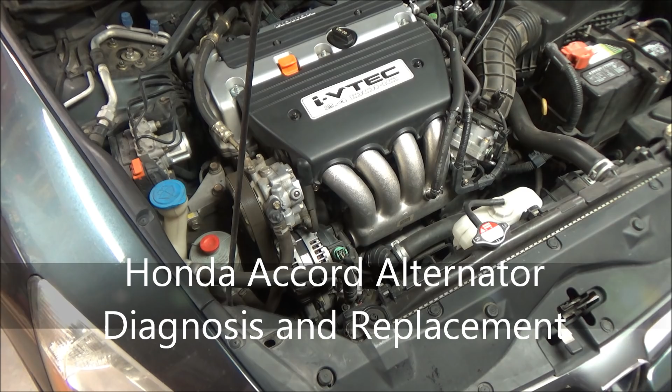We got a 04 Honda Accord 2.4. It's got a battery light on. That's usually a fault with the alternator, but let's do some checks before we start throwing parts at it.

When I pulled the vehicle in, I made sure that the battery light came on when you just turn the key on, and then when you start it, the battery light stays on, where when it's operating normally it should shut off. So I did verify that.

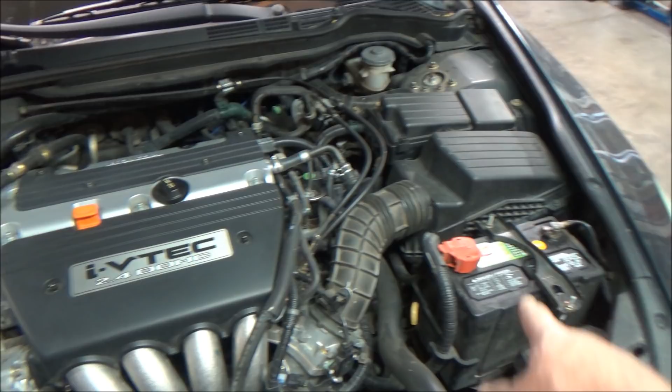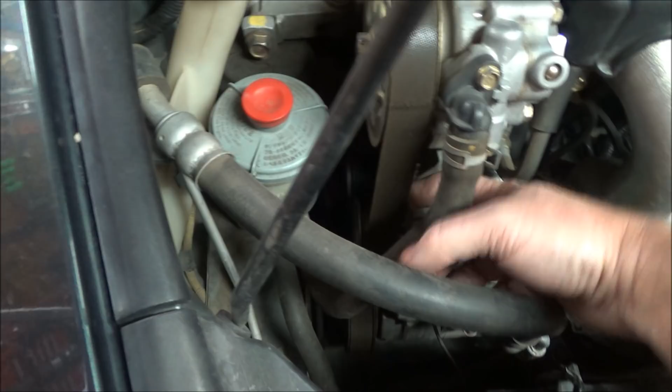We'll do some quick checks. We'll check the voltage on the battery, and we'll check the voltages here at the alternator. Also, while we're under here, you want to make sure your alternator belt looks good, or actually this is the whole drive belt, but the belt hasn't come off or anything. Then I will start it and we'll verify that the pulley's moving correctly. Although, if it's seized, you should probably hear a bunch of squealing and stuff. But we'll check those things out and go from there.

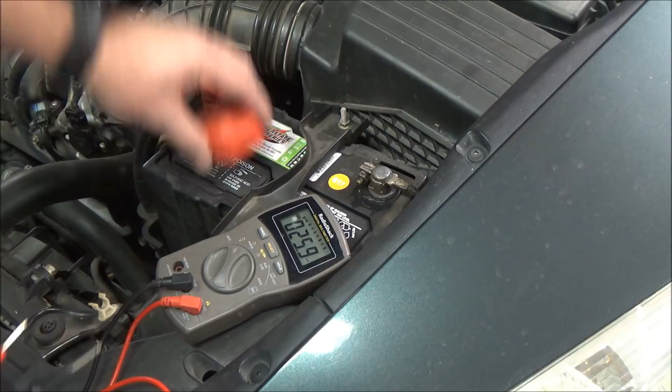We'll just see what the battery voltage is on this battery. We got 12.4 right on the battery itself, and then on the posts and cables, I like to check the cables too. We got the same, so we know that it's not a bad connection in between the post and the connections there. So that looks good.

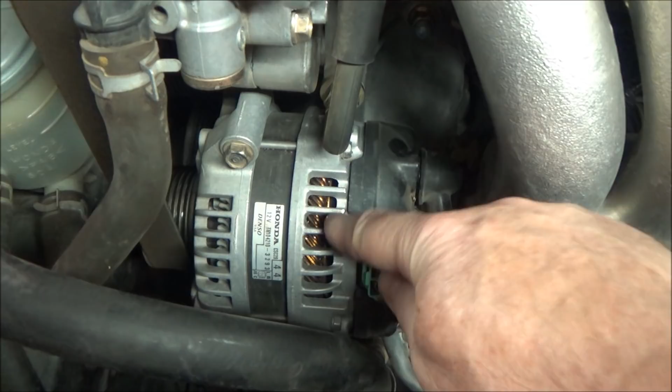Looking directly at the alternator here, if you didn't know, this is your alternator. This under here goes straight to your battery post. So we need to make sure we got 12 volts there, and we'll also do a voltage drop test on the case, which is grounded, and make sure we don't have any voltage difference between here and the battery. This black with yellow wire up in the top corner, which I have back probed, that's going to be our 12 volts when we turn the key on. So once we turn the ignition key on, we should have 12 volts on this wire right here.

We'll just go from battery negative right to the large post down here, and you can see we got battery voltage right there at 12.4. Now we'll go battery positive to the case, and you can see we have 12.4, so we know we're good there too. As a voltage drop, although it's unloaded, it's not great, but we'll look and see, make sure. Going battery power to the post down here, we have 0.4 of a voltage drop, which is fine. Then we'll do the same thing on the negative post to the case, and we got 0.3 of a voltage drop. So although it's unloaded, there shouldn't be an issue, at least right now. With an unloaded, we're good.

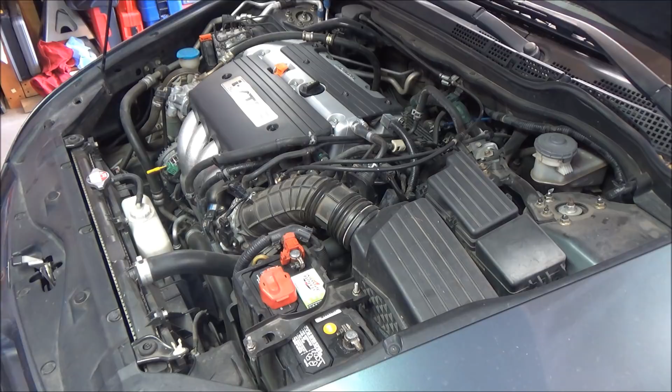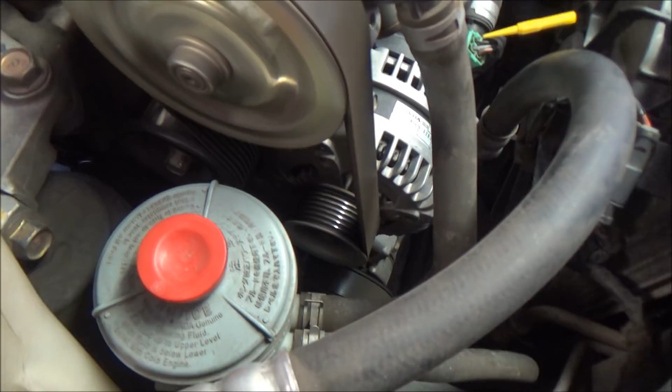I'm going to start the car and then we'll see what the voltage is on the battery. You can see the pulley's moving, but that alternator is making a lot of noise. That's a good indication right there we got a bad alternator. And I can smell it too.

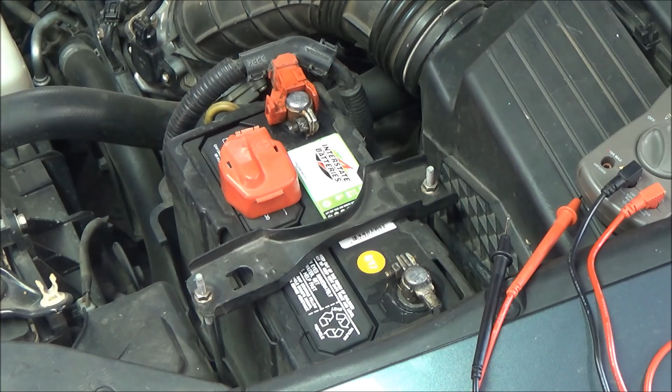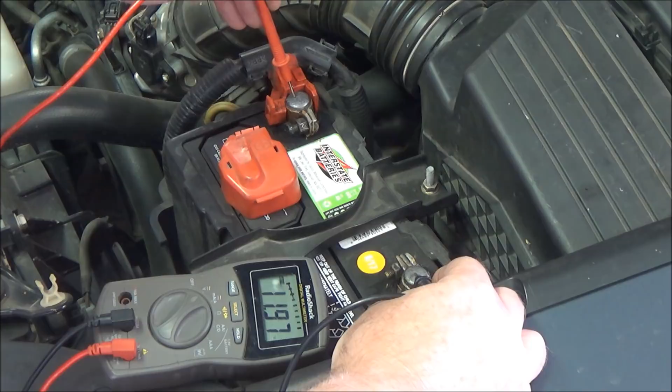You can see it's at 13.2, so it's working but not very well. 13.1, it's dropping. I just put the headlights on high, that should command the computer to give us a full field on this. You can see we're at 12.0, 11.98 with a full load. So this alternator is not putting out like it should. We got a bad alternator. And you can see here with the car on, we got the battery light on right there.

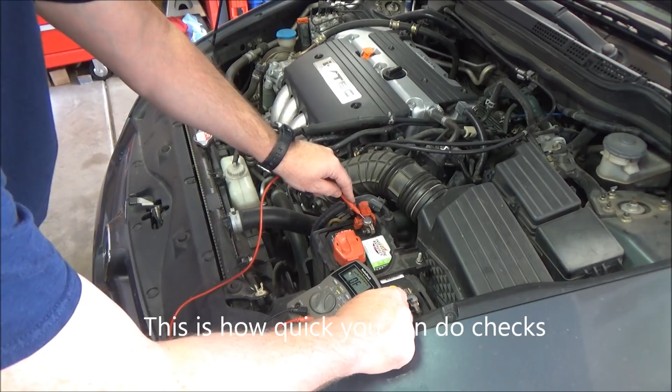27 millivolt voltage drop. Pretty much a zero voltage drop on the case.

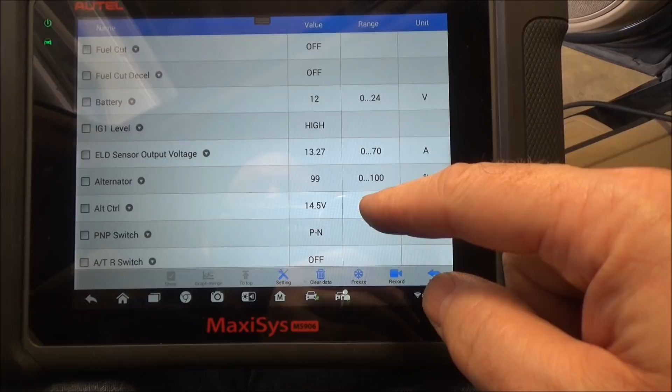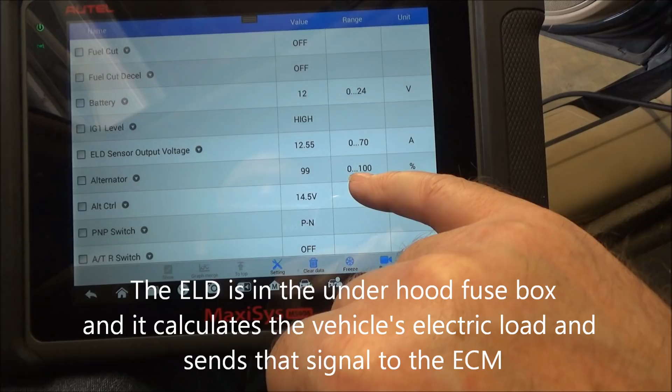What I like to do is look at some scan data, see if we have good looking inputs. You can see our ELD voltage is bouncing around, which means it is working, or it should be working. But our battery voltage is at 12 even, and our alternator percentage is 99%. So it should be giving it more voltage than it's certainly showing.

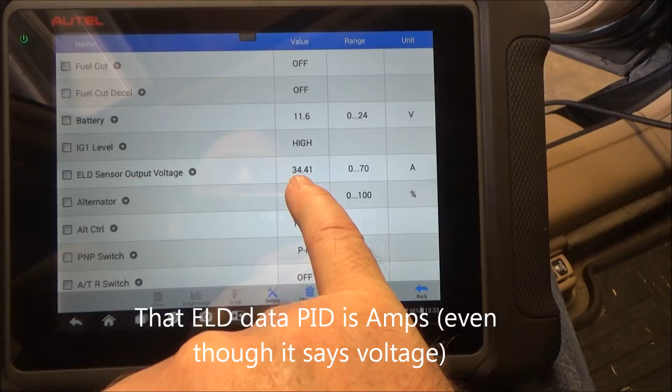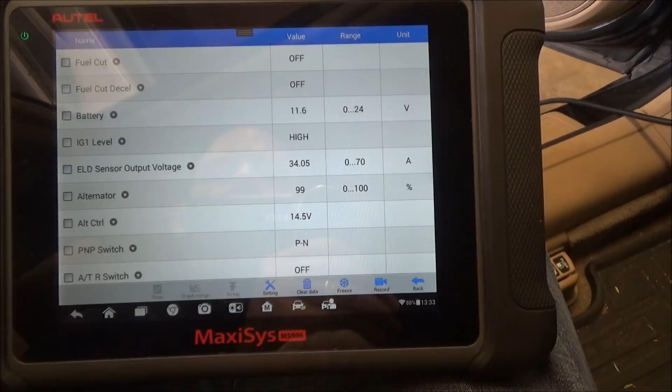We'll turn the high beams on like that. You can see our ELD voltage change went up real high, which in turn tells the computer, hey, we need more power at the alternator. You can see these didn't change, and our battery voltage dropped to 11.6. So I think all our signals are good. It looks like we have a bad alternator.

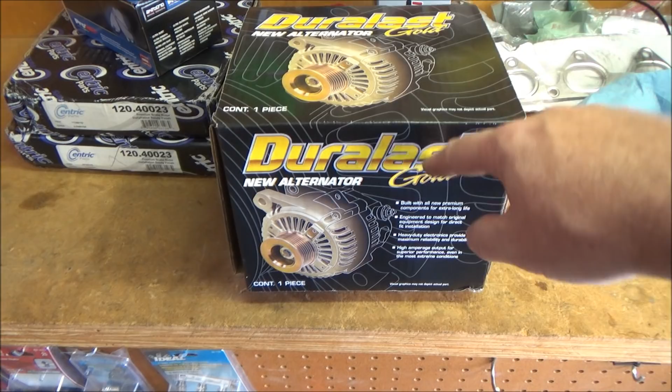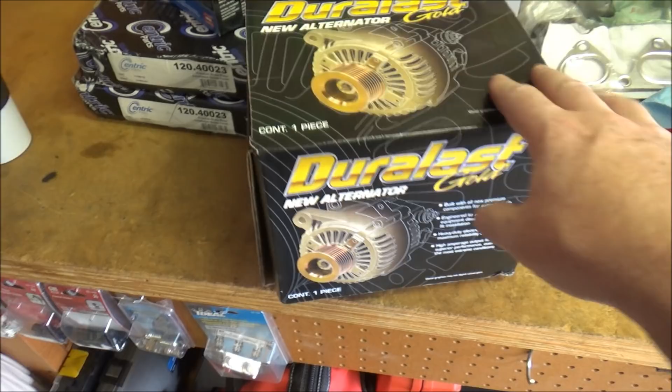Here's the new alternator. We got the new alternator now. We're going with the Duralast Gold. The gold seems to be decent. There's the part number on this model. This one's made in Taiwan. It is a brand new unit, not a remanufactured unit. I'm not a huge fan of reman stuff unless it came straight from Honda. But this is quite a bit cheaper than the Honda unit.

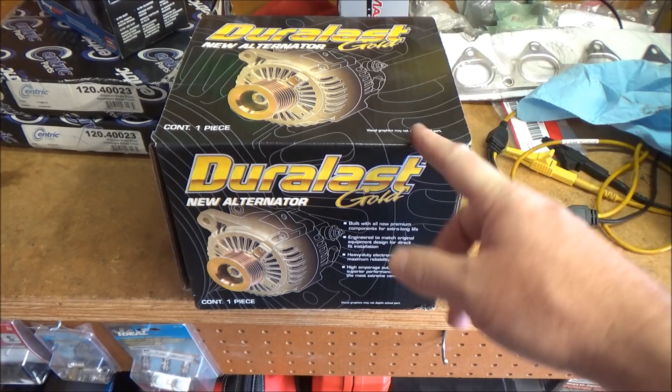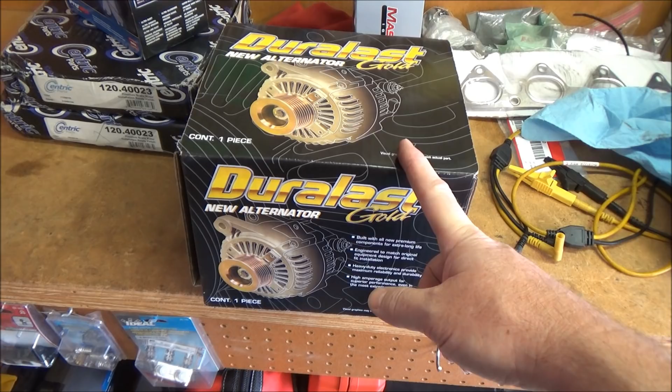And it's not too difficult to replace. So if I do have an issue with this, I can pop this out and get another one from AutoZone pretty easily. If this thing was buried in there, I would go with the Honda unit. So this is what we're going to go with.

Alright, we're going to go ahead and disconnect the battery. You're going to lose all your presets on your radio, and if you still have the factory radio, it probably needs a code. Make sure you have the code first, or you're going to not be able to use your radio, and you have to go to the dealer to get the code back.

Always disconnect the negative first, then we'll disconnect the positive. Make sure to get them out of the way so they don't touch.

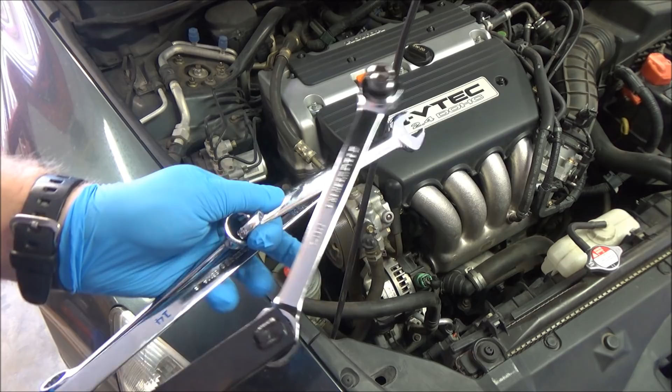Alright, next up we got to get the belt off, or at least off the alternator pulley. It's a 14 millimeter nut right on the tensioner, the belt tensioner. You can use a couple different tools. You can see I got a 14 and a 17 linked together to make one long wrench, because you're going to need a long wrench. I have just a 14 really long 14 millimeter wrench, or you can use a serpentine tool like this. So, but you got to use something.

Pull that tensioner back a little bit so you can get the belt off. If you want to know how to replace this belt, I did do a video on the same vehicle.

As you can see, the belt is loose now. We can leave it right there.

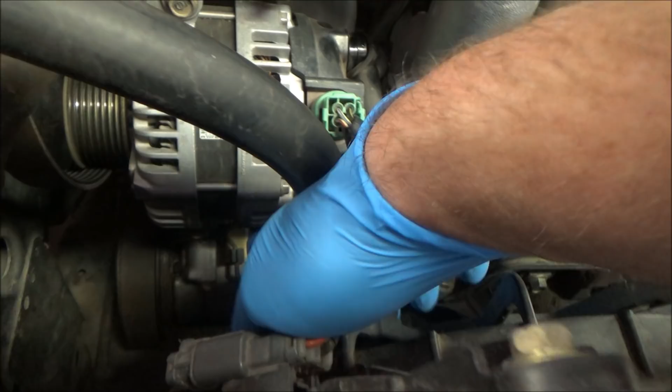Now we just need to take this bolt off, and then there's two bolts. I don't know if you can barely see them, one right by the tip of my finger here and one over here. And then we got this plug here.

We'll just go ahead and unplug it if this thing will come off. Sometimes these things are fused on there, they've been on there a while. So we'll unplug that, and then be careful, this is going to be hot right here. All this will be hot if it's been running, but we'll have to loosen that nut right there too.

Alright, just going to reach in here with this wrench, crack this 10 millimeter loose. Too loose.

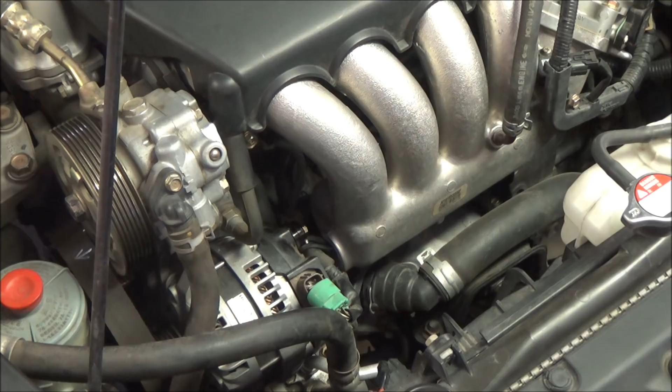Alright, when you spin it off, it helps to have a little magnet here, unless you like to go fishing.

Alright, this is the setup I'm using, 3/8, which is a 3 inch extension and 12 millimeter socket. This one has a flexible handle, just in case I need it. Break these 3 bolts loose. They can be on there kind of tight.

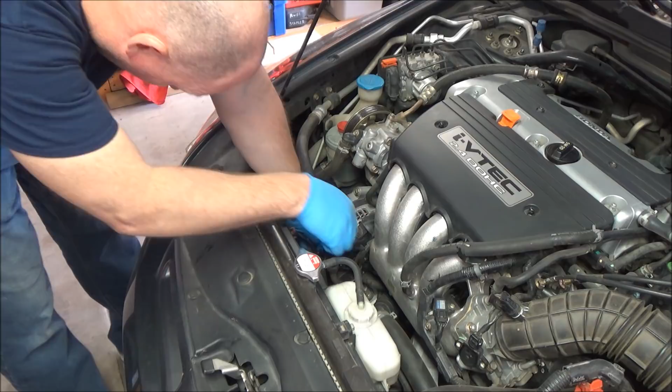Just sneak around everything with this setup. There's the second one, and then the third one. There, all three of them are loose. I'm able to do it just with this.

One, two, as you can see, they're the same size, so it doesn't matter if you mix these two up. And the one on top is long.

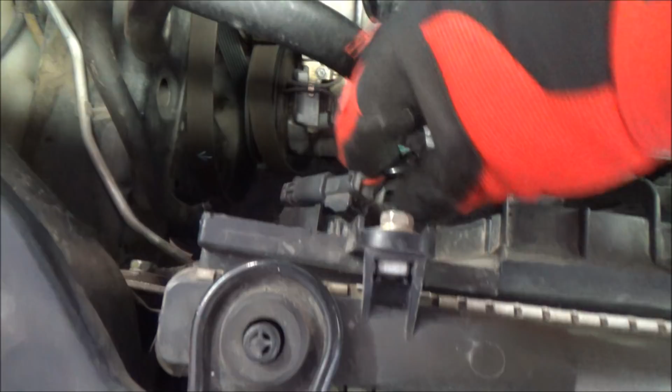Got to manhandle just a little bit, but you can get it out. And just to give myself a little room, I popped the power steering out of its bracket so this hose would move. And then this just kind of sits right in this groove right here. Pop that out to get a little more clearance. And it's always a good idea, match your parts up, make sure they're the same.

Much easier if you drop it with the pulley straight down. Just drop it through here and then turn it. More of a pain getting it out, a little bit easier getting it in.

Alright, now that we got it set in place, what I'm going to do is I'm going to connect this while it's loose and we can get to it, and then we'll set it up into place. Easier to put this on and tighten it up now while it's out of the way, otherwise the manifold here's in the way.

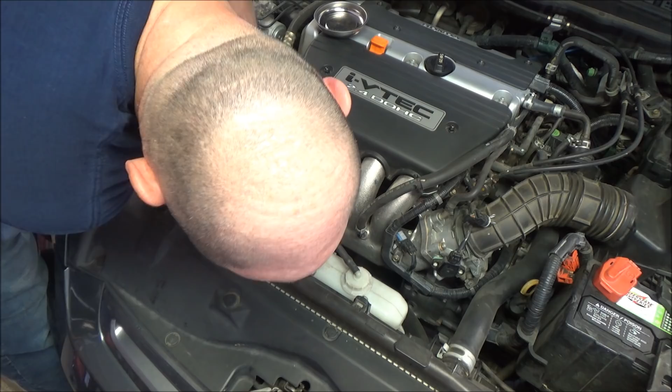Alright, now we'll just torque them down. Alright.

The little nut on the battery post, or the cable that goes back to the battery, that's only 6 foot-pounds, so don't kill that. Just get it snug. It's going right next to plastic.

And then these other 3 12s are going to be 16 foot-pounds. Just be smart about your torque. 16 is not very much. Right there, look at that, 16 on the dot. Alright, 16, all three.

Now, if you ever do this job, you'll notice there's hoses and stuff in the way down there, plus the fan. Now, I was able to get loose this inside bottom bolt with this. And just had to move it a little bit like that, and went at that angle.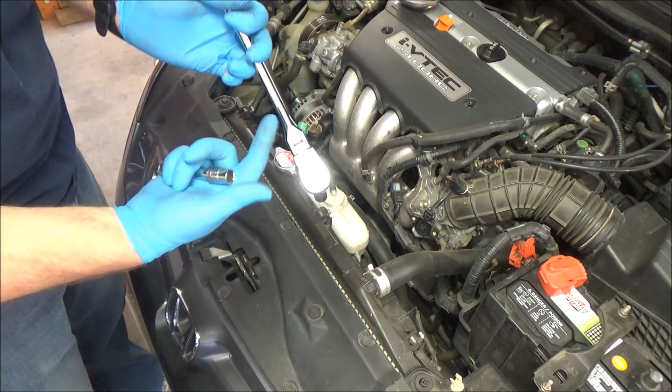You can also do it just with a standard, or I'm sorry, a deep socket with no extension. But you might have to go at the other angle like this. And then the other ones you should be able to get to no problem. But in most instances, you're probably going to need a wrench that'll bend a little bit like that. You can get a cheap one at Harbor Freight, they don't cost much. Then this one's pretty easy. It's right there.

Alright, we'll plug everything back in. This plug that we moved out of the way on the fan, we'll get that back. Power steering, we'll get this back into place. Like that. Then we'll get our belt on.

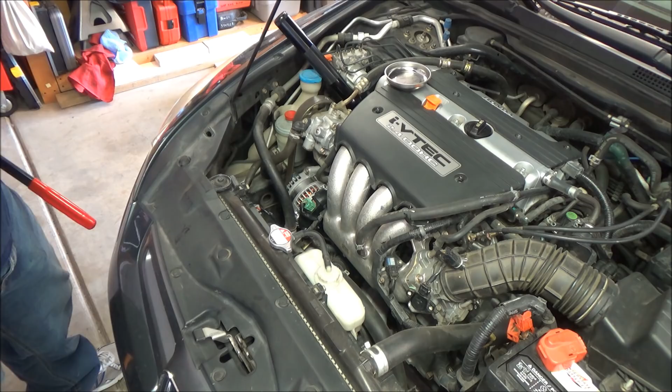I'm not going to rehash how to put the belt back on. If you want to see exactly how to take the belt off and put it back on, watch the other video. Alright, go ahead and get our battery back on.

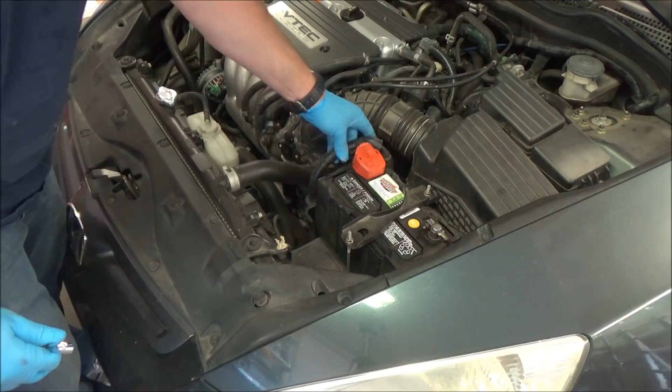This is just a 10mm. I like a 10mm deep to do the batteries. Don't kill them, just get them snug.

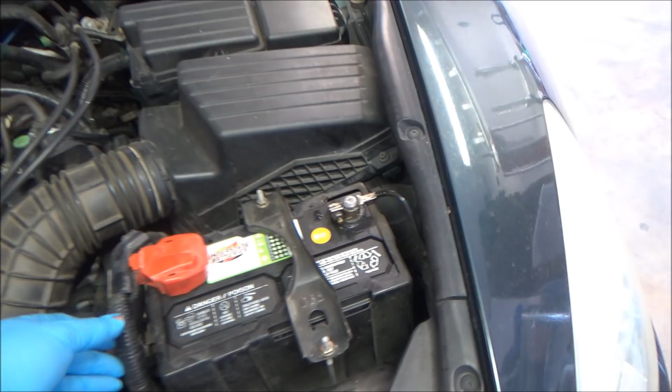Just remember, the negative cable is always first one off, last one on. Alright, before I go firing it up, I'm going to give it a once over. Make sure my battery looks good, make sure I'm plugged back in, my cable's back, and it's got the rubber on there. All 3 bolts are tight. I like to touch them, make sure. Make sure power steering, that's back in place.

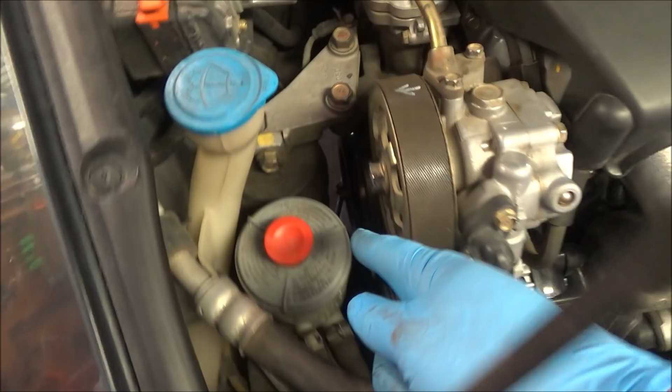Now this is popped out. Put that where it belongs. And then I always make sure this belt is around all the pulleys properly all the way down, especially down at the bottom. And make sure we're not leaving anything behind.

One more thing, we'll put a zip tie around this cable. There, that way this cable won't go anywhere, won't rub on anything.

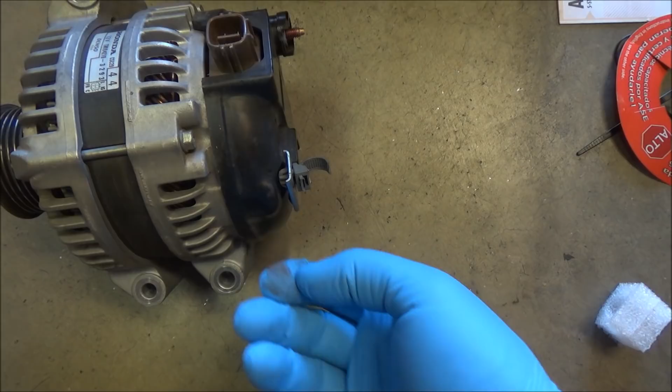Now, with regards to this little clip, you can try to unclip it, reach in there and clip it off, keep it with your cable. Usually these things are, if they're not already broken, they usually break as soon as you touch them when they're this old. It's up to you. I usually just leave it alone. As soon as you move the alternator, it'll snap right off.

Can you see that? 14.2, 14.18. And as you can see, battery light is out.

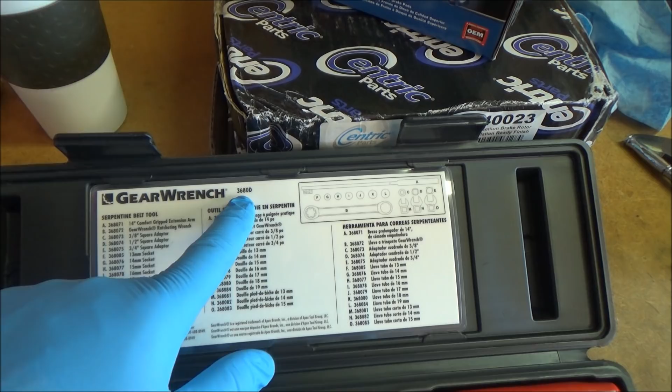This is the serpentine belt set that I used. This Honda uses a 14mm, but this is the kit made by GearWrench, 3680D. That's the kit I used. And the other tools I used, just this 3/8 inch ratchet from GearWrench that bends.

I did use a long 10mm wrench to break that nut loose. You can use a standard one, standard length 10mm wrench. Just the added length makes it a little easier. I just used a 1/4 inch ratchet with a 10mm for the battery and to tighten that 10mm nut back up.

12mm deep and shallow sockets with an extension, just whatever your preference is. I ended up using both on this, along with my Milwaukee ratchet. Just makes it easier to spin them on and off. And a cup of coffee, don't forget that.

And of course I used a torque wrench too. This is a digital one from Snap-on. Costs a lot of money. You don't need one like this, but I would recommend, if you don't know the feel of fasteners, use a torque wrench.

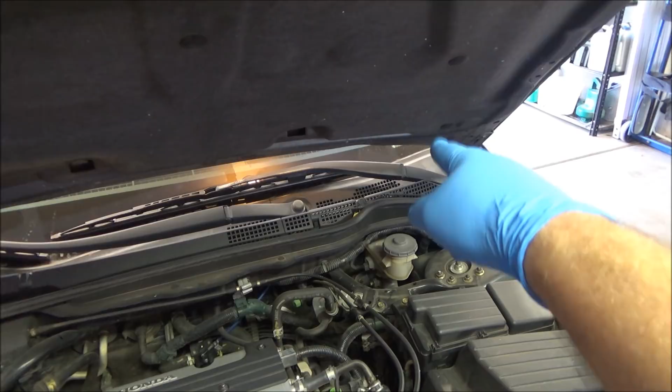And I forgot to mention while I was doing my checks, but if I didn't have battery voltage right here, I would have made sure I had a good connection. And if I was confident that there was a good connection right here, then I would have to go to the 100 amp fuse that's inside this fuse box right here. Should be the number 22 if I remember correctly. Make sure that's good. And then if I didn't have power on this other black with yellow stripe wire right here that comes from your ignition feed, you got to check the under dash fuse box. That will be the number 18 and it's a 15 amp. And I would have checked that to make sure that I had power there before I went further.

There you go. That's how I troubleshoot and replace the alternator on these 2.4 Accords.

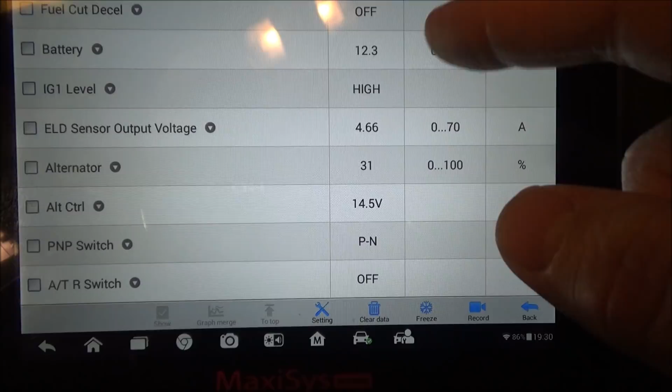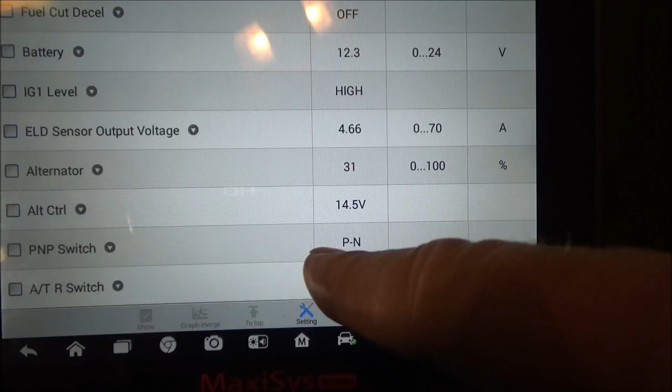A little bit of bonus footage for you after the fix. Looking at the data PIDs, you can see battery's at 12.3, ELD is at 4.66, alternator's at 31% bouncing out right there, and our alternator control's at 14.5. So let's go ahead and fire it up and see how these change.

You can see our battery voltage is up at 13.7, 13.8. Our ELD is bouncing around now, which indicates it's working. Our alternator is at about 30, 32, 27, right in there.

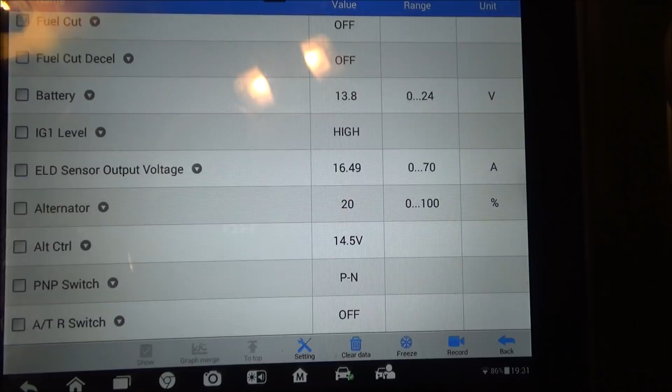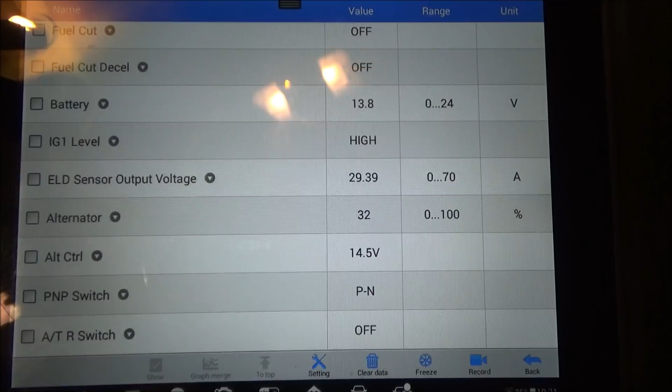Now I'm going to turn the headlights on and see, watch that ELD change. See, I went up to about 28, 29. Now we'll put it on high. High beams are on. Now it went to 39.

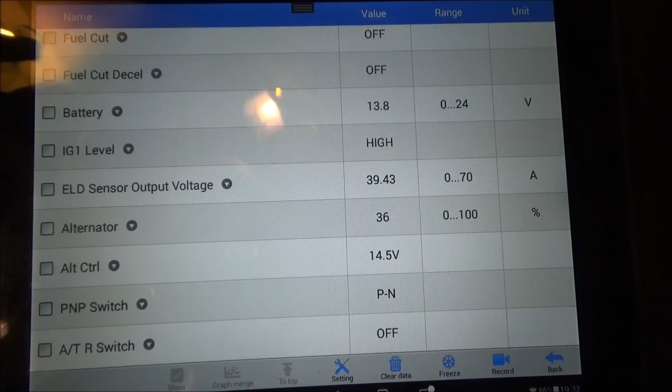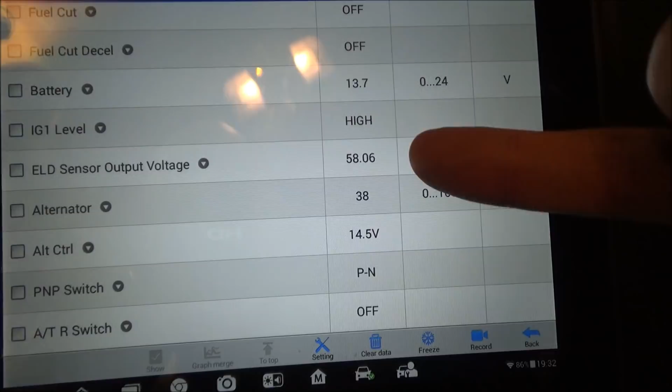And we'll turn the blower on high. You can see where that voltage is now, where the ELD is at now. You can see our alternator's up, bouncing between 45 and 50.

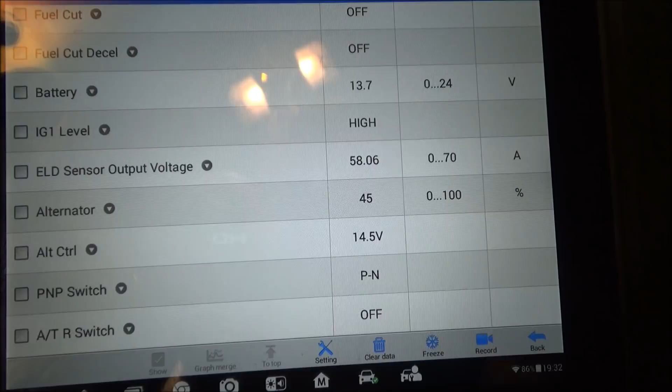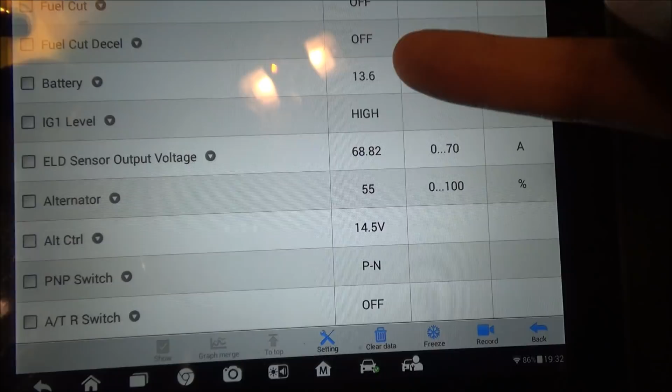And I turned the rear defrost on. So now we're pretty much maxed out. You can see we're holding steady at 13.6. ELD is at 68, and our alternator's at 50, anywhere from 50 to 60.

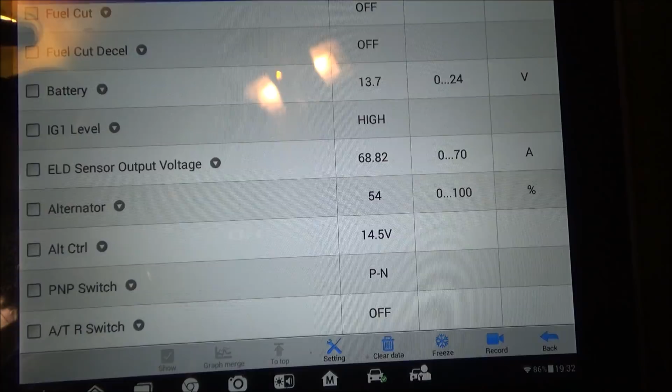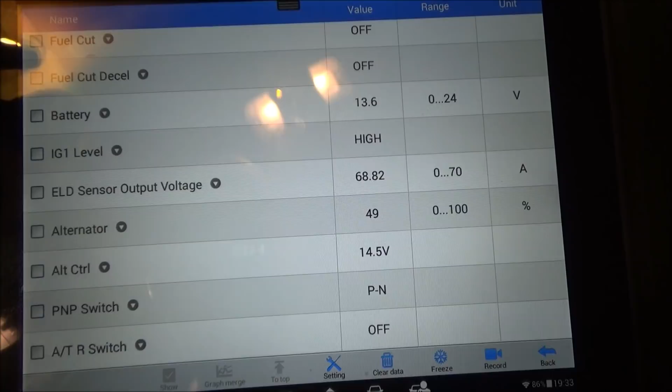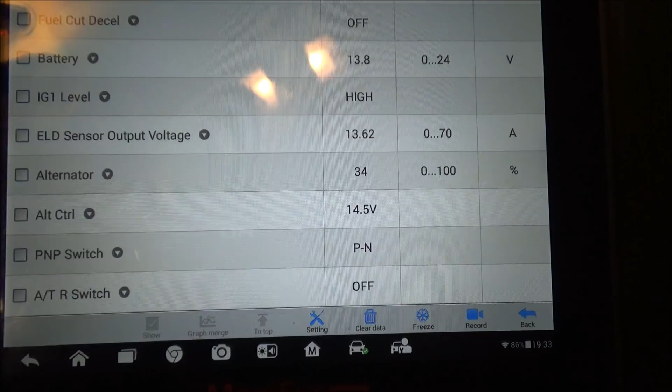And you watch as we shut things down. Now everything's back off. So you can tell the computer's in full control of this.